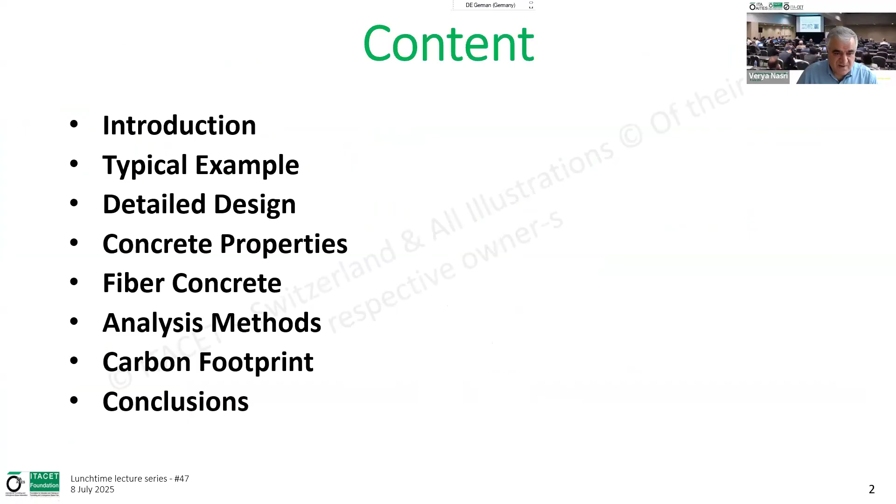Thanks a lot, Christine, for the introduction, longer than what I gave you. So, one second to share my slides. Hello everybody, and thanks for attending. I am going to talk about a real-world example, and through that, try to explain some major details, give you an idea, and later you can go and read more on that subject.

So I start with this example, which is a metro tunnel, the conventional one-track 6-meter diameter. Here, if we talk about ring configuration, for this size we are using 5+1 with a small key, or 6+0 with a big key, which can also be called 4+2. All the segments are practically the same size. We define the segment length based on the alignment and minimum curve radius. We try to optimize it even to the centimeter because that's a lot of material over kilometers. The concrete used for this particular project is 50 MPa; usually nowadays they use 60 MPa easily. That's typical. You see here the configuration for the tangent alignment, and also a small detail about the key segment.

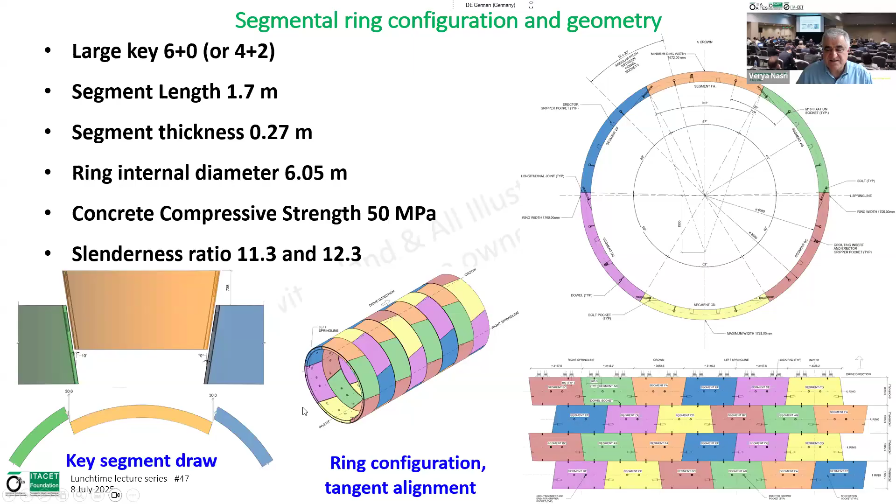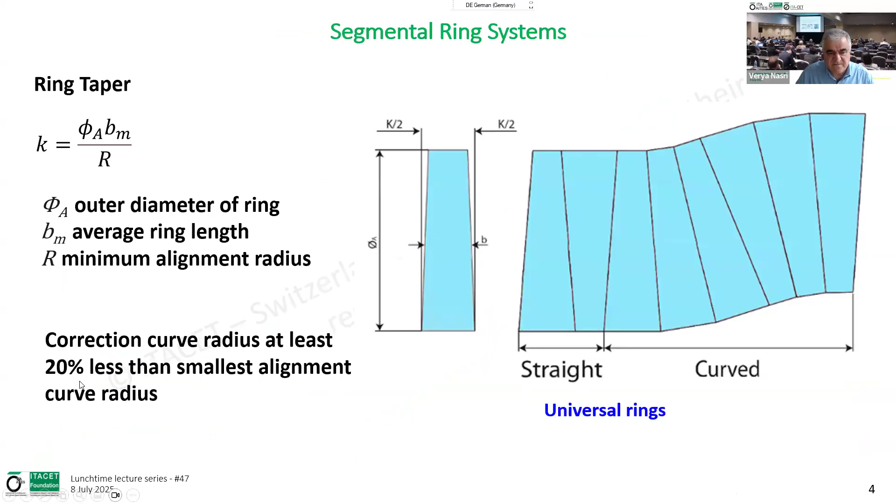Draw with installation of the last element, which we have to play with the angles to have a draw which fits into the machine's basic characteristics. Then for this project, we use a universal ring, which is the best configuration with taper on both sides. For the taper, we use this simple formula: phi A is outer diameter, bm is the length of the ring, and r is minimum alignment radius. We should reduce it by 20% for correction required for the alignment.

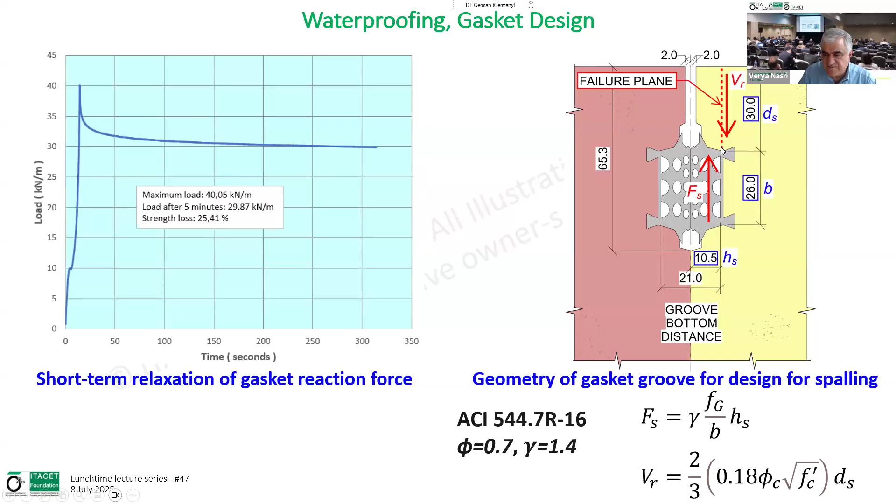Then we divide the pressure, the force we have here from the gasket, by the length B, that gives us the pressure. Then we apply it with the height HS, and that would be the total load, which should be resisted by this shear of this edge of the segment. Based on that, we design the geometry for the gasket.

Now we go to the issue related to the gasket, but for the design of the dowel in the circumferential joint. One loading which governs is accidental removal of the thrust jack for lack of power or any other reason. So you see here the free body diagram: the weight of the segment, the force of the gasket, and the resisting force of the dowel here.

So we take a moment around this pivot point, which is this edge of the stress relief area. This is the moment, and based on that we can find basically the forces in the dowel and see which dowel we can use for the design.

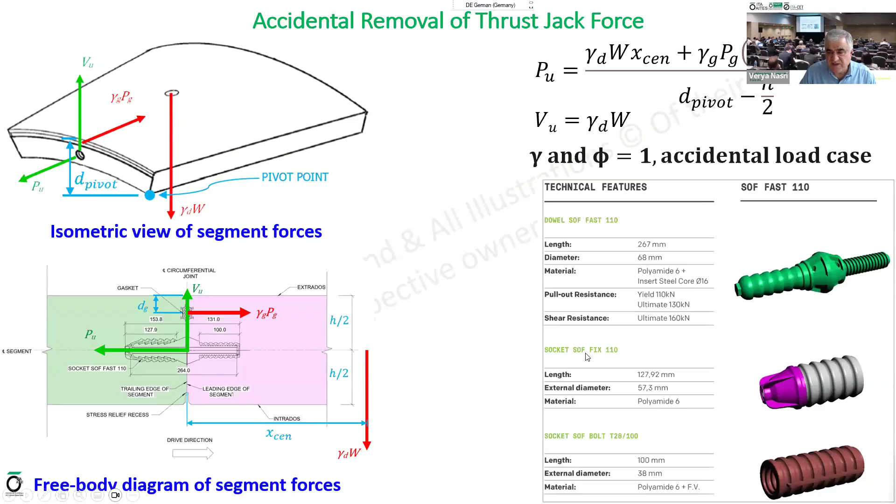Now we can go a little bit farther with a particular dowel. This is the dowel pull-out test results. At yield, it moves about 7.7 millimeters. If we consider the movement around the same pivot point, with this 7.7, the movement around the gasket will be 8.9. I showed you that we had 12 millimeters, which is when the gasket was completely open.

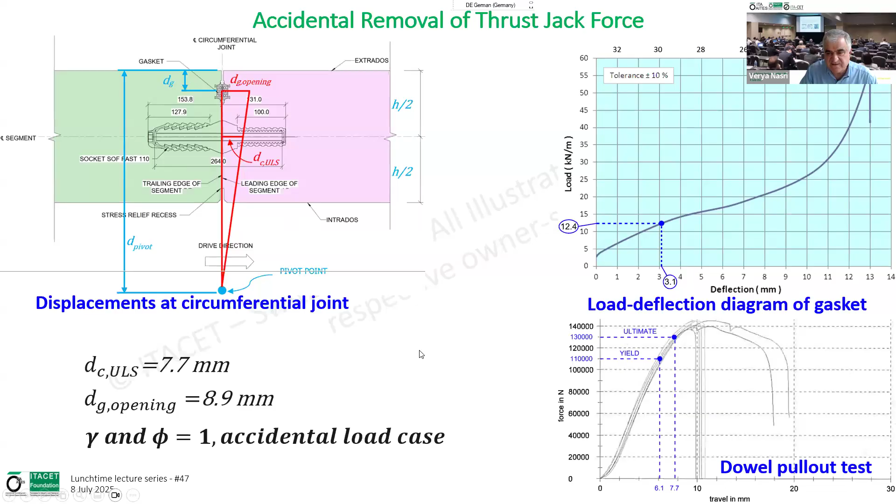So the difference between the two is 3.1 millimeters, which we take to the load deflection curve of the gasket. We find that we have 12.4 kilonewton in the gasket, which will be used for the design to verify whether we have a stable situation here.

So to design the bolts, this is very straightforward - the pressure in the gasket. We have to consider two angles: the angle of the longitudinal joint and also the angle of the point, and the formula we see on the side. This will give you the design of the bolt based on the characteristic of the bolt.

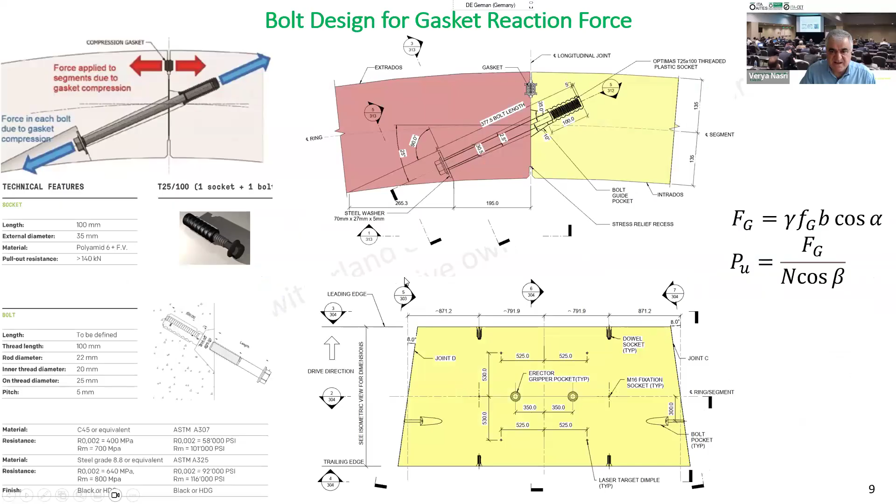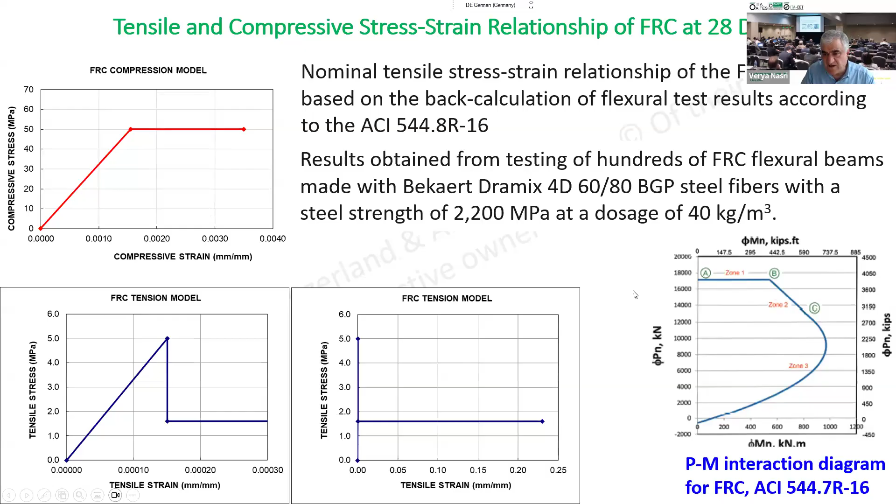This is explained in Appendix A of 544.7R ACI. So now, how we design our mix.

If we have a number defined for residual strength, say FR3 at 4.6, we have to consider a higher number as the mean result of the test to get this number with 95% confidence. What we do, we use this formula for the mean.

This is the specified value we have. This Kn is a coefficient depending on the number of tests. For example, here we are using 12, so the Kn is 1.71. And Vx is a coefficient of variation, which usually at the beginning we use 20%.

So based on these numbers, for a 4.6 FR3, our average mix result should be 7. So this is how we design the mix.

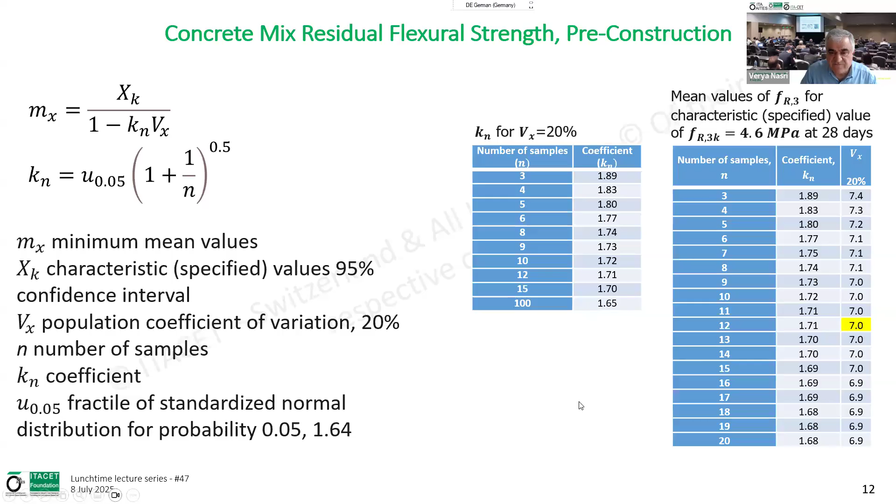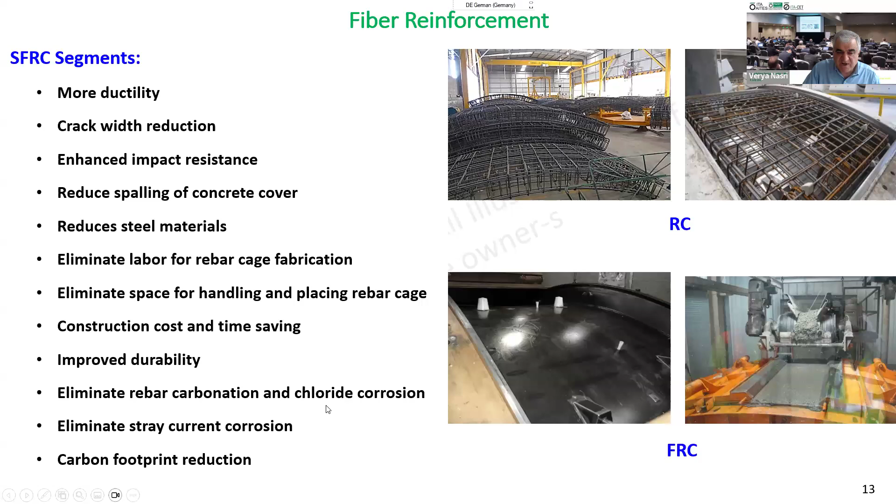Now we go to the advantages of fiber. You are all familiar with better ductility, less crack, better impact and spalling behavior, less steel and less labor to put these steels together, less space and workshop for the steel, and then less cost and schedule, better durability. Since we don't have rebar, we don't have carbonation, chloride, and stray current corrosion, and less carbon.

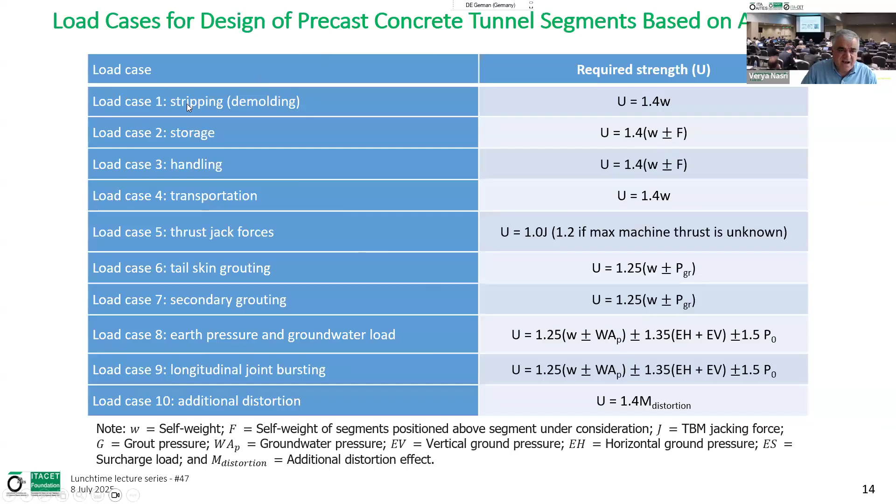So what we use now for load cases and load combination, we use this kind of information from ACI for different load cases. This is the basic load cases for production and transient.

You can define it yourself. For each of these equipment, you will have your free body diagram and the relevant moment for it. You see for this particular example how those are built.

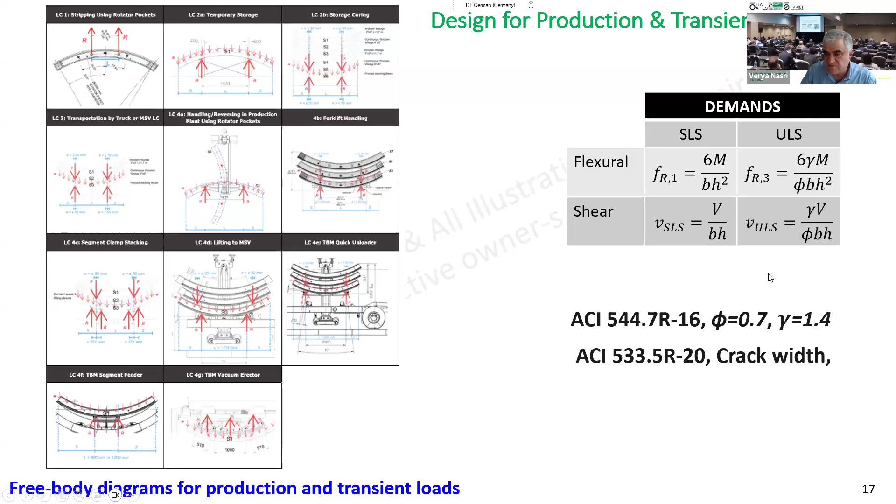Then in terms of the demand for SLS and ULS, based on FR1 and FR3, for ULS we are using load factor and strength reduction factor. These are typical. And some small discussion about thrust jack force.

For this particular example, David will talk about more detail on this subject. So we use this Iyengar diagram, which is analytical. This formula here is drawn.

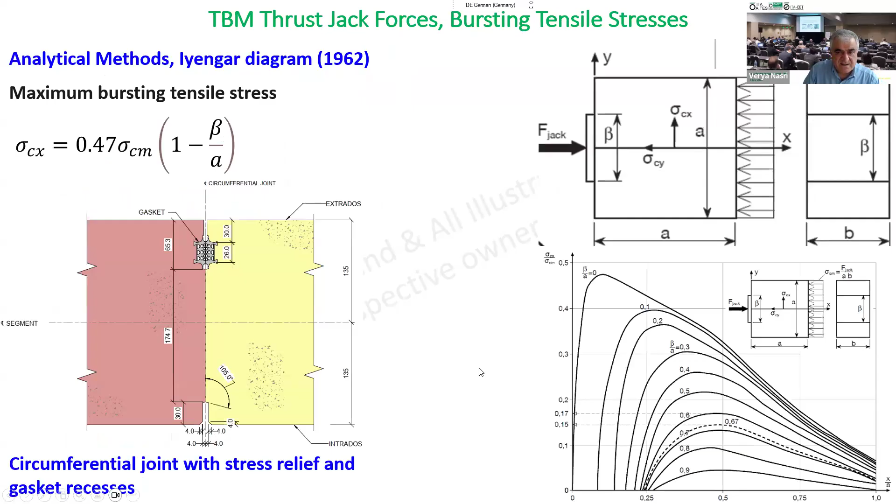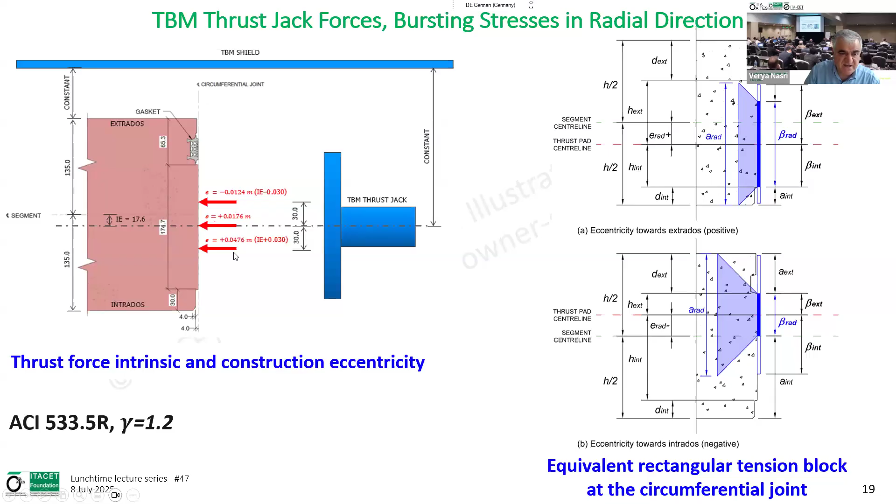Here you see the section in the radial direction. We have here intrinsic eccentricity because of the presence of the gasket, and we have to consider a construction eccentricity based on ACI, say 30 millimeters on both sides of this. Based on that, we do the calculation.

We can have dispersion in both directions, in the circumferential direction also. You see here the configuration of the pads. We have to design the size of this, but it should not be closer than 120 millimeters to the edge of the segment.

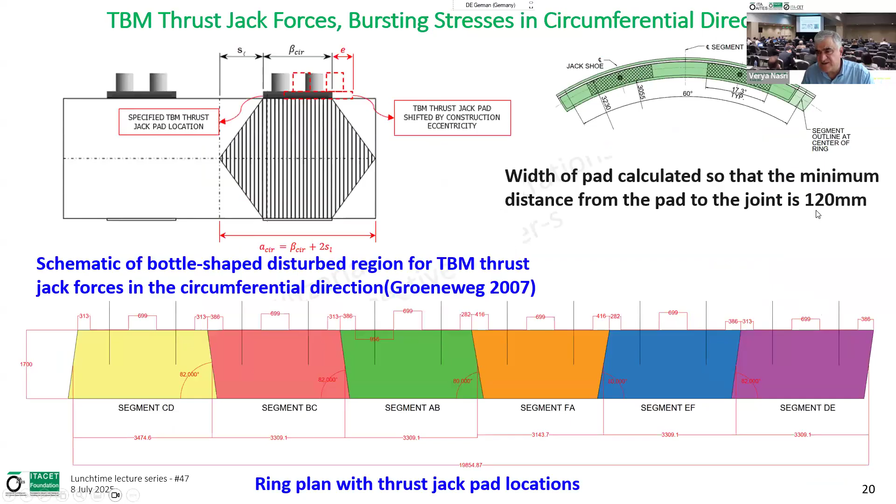Then we go to the spalling now. We don't have an analytical formula for spalling, so we have to do 3D analysis. We have to do a nonlinear analysis, and we have to verify the cracking.

In this particular case, we use a total strain crack constitutive model. There are different constitutive models for cracking based on a smeared model. We consider different segments and different eccentricities, and for boundary conditions, we consider normal compression-only boundaries.

Here you see the allowable cracking from 0.2 to 0.3, from the Austrian Tunneling Association, depending on the type of application and level of dryness.

For the spalling, as I said, in the longitudinal joint, you see here either we have this kind of trapezoidal or triangular distribution when the joint is open, when the resultant of the load is outside the middle third of the segment. You see here, for this particular case, we draw the crack width based on the thrust force.

This is the region which is not acceptable, beyond the values which are specified. You see the spalling stresses between the pads and the cracking, the result of the modeling.

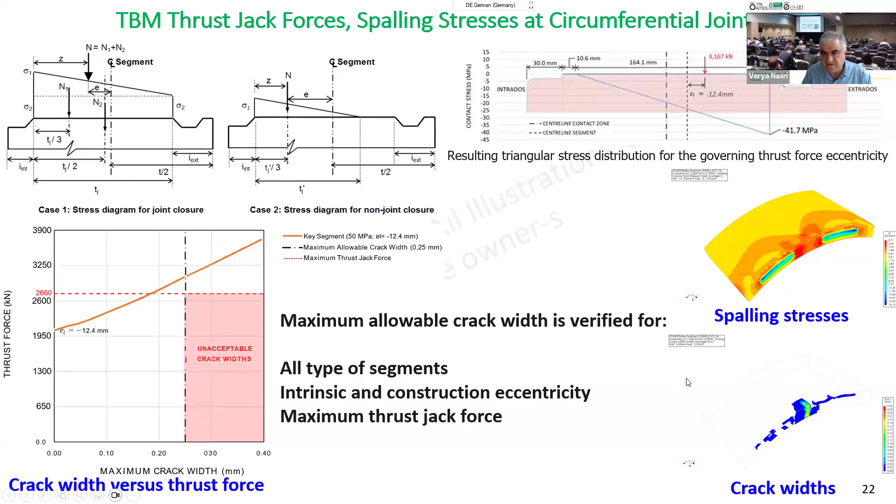Then we get to tail skin backfill grouting. Nowadays, 2-component grouting is used, which at the beginning is liquid, then mixes within a few seconds to gel, and then over about 25 minutes gets to 1 kPa, and after 1 hour about 100 kPa.

So then we use this formula to solve for the pressure of the grout minus pressure of the water, how much it should be more. And then we use the equilibrium in the vertical direction based on weight of the liner, buoyancy of the grout, and then shear stress of the grout.

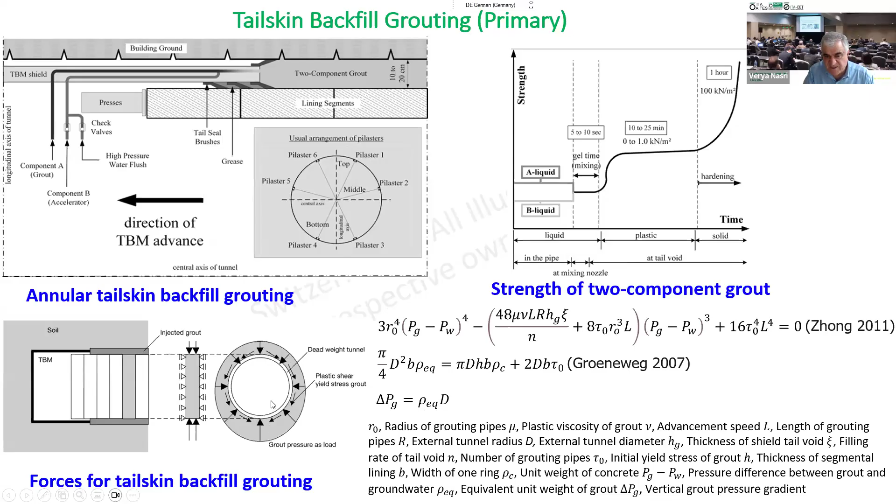And we find the unit weight of the grout, and based on that, we find the grout pressure gradient. From that, we use this model of the ring for that pressure and its variation applied.

So we use the interface between segment and also ground boundary, depending on if it's rock or soil, and how flexible it is. Different models can be used, and we get axial and bending, and check it with the interaction.

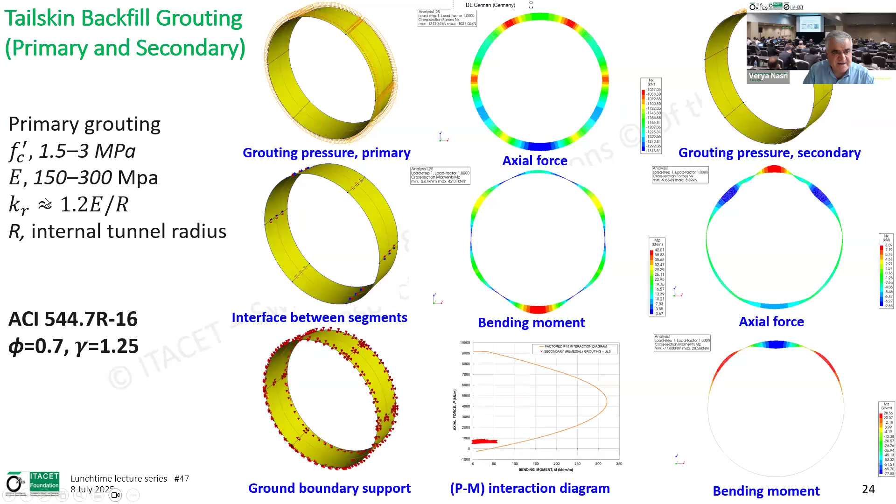Now if we have deficiency in primary grouting, we do secondary grouting. This is pressure applied on a limited area. But in this case, the primary grouting is already hardened, so we should consider its parameters in the analysis.

We use sequential excavation modeling, and we apply face pressure and its variability. We consider conical shape of the shield using gap elements, and then we use grout pressure considering the age and strength of it.

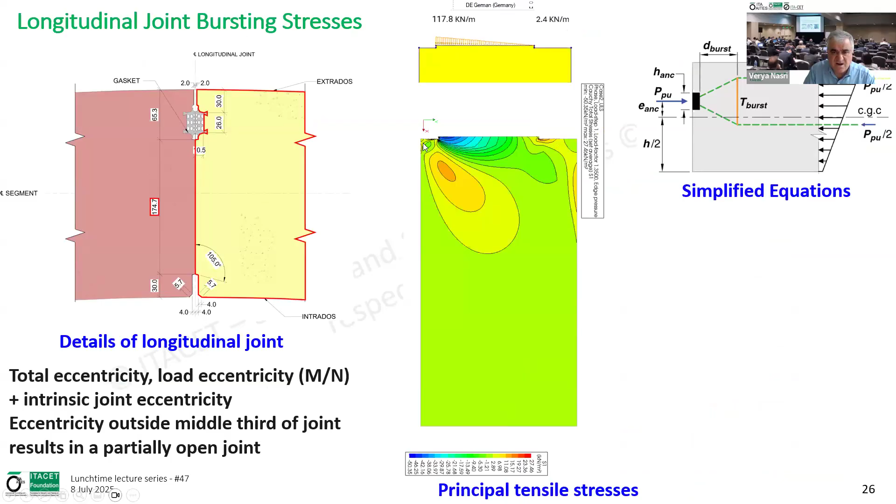So one load case is also longitudinal joint bursting. For this, either we use a simplified equation from ACI or we use a 2D finite element. This is very simple. We use a model here which is twice longer than the length of the segment.

And with that, I get to the carbon. With fiber, our carbon significantly reduces, because if we use fiber instead of rebar, we will have about half of steel weight, and the CO2 equivalent factor for fiber is less than half of the steel. So using fiber instead of steel, we are saving carbon by 5 times.

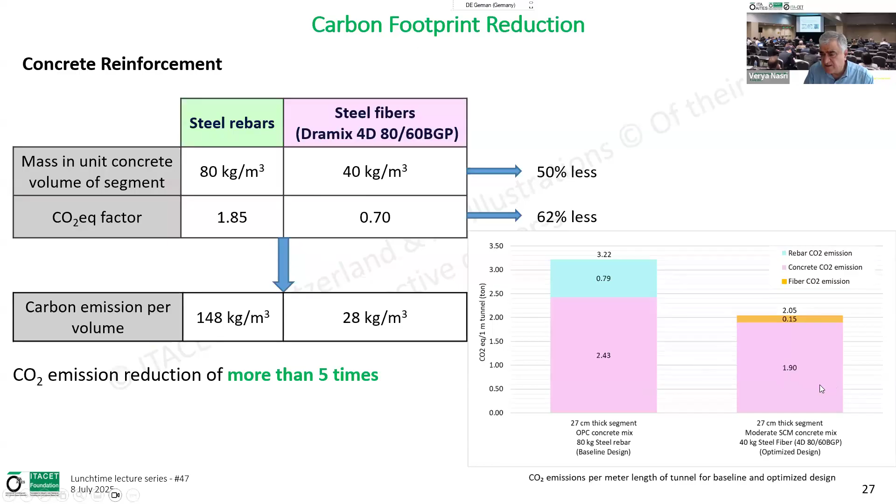Here you see the comparison. Here also we use some SCM, supplementary cementitious material like slag and also silica fume, to reduce the carbon from concrete also.

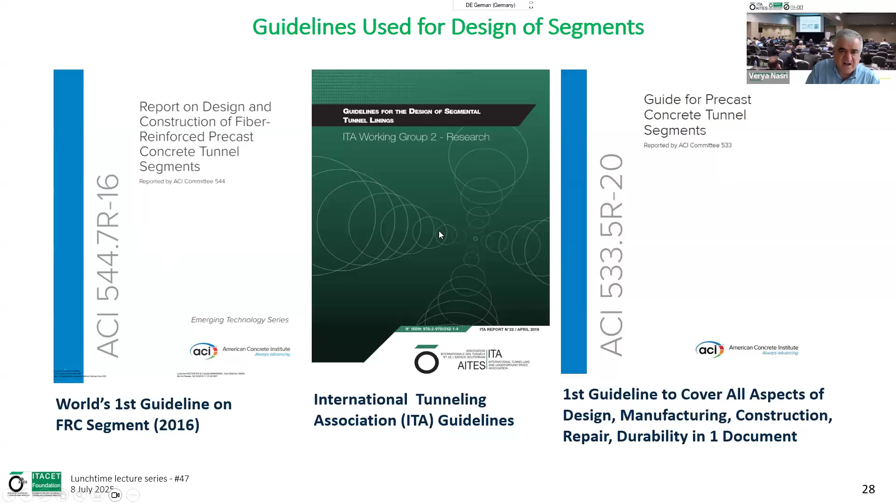For the references, you can use this document, two ACI documents, one for fiber, another one general, and the middle one ITA, which we contributed to producing, and also a handbook which covers everything I said in detail and many other subjects. This is a good reference.

So the conclusion is the fiber is really the way to go. The rebar is obsolete for the segment. It has significant advantages, I won't repeat it here.

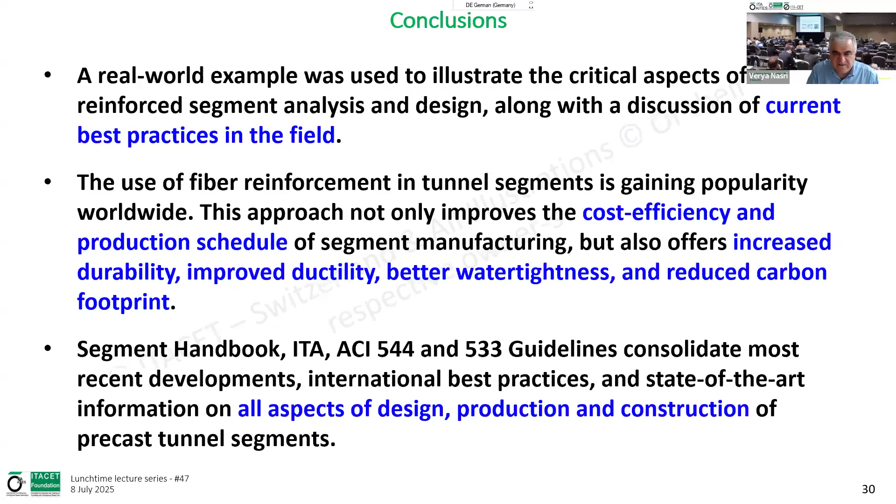Through an example, I explained some details of the design, which you need to follow up with books and other references, and also the document I mentioned. These are the guidelines, but this is basically advancing technology. Things are moving very fast, and this needs to be updated with time. This is some other references you can consider looking at.

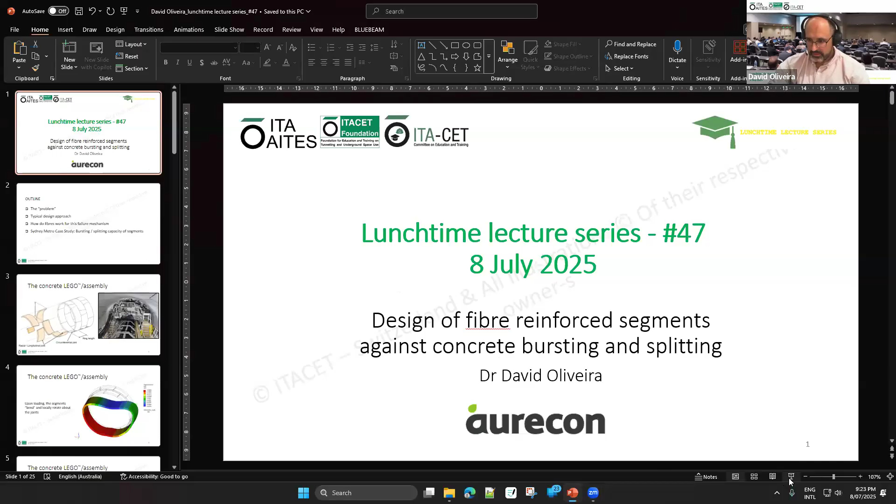All right, okay, well thanks everyone, and good morning or good afternoon, good evening, depending on the time zone you are. Thanks for attending and listening to me.

I chose this topic, and very briefly touched on a bit of this. I selected it because there is generally a lack of detailed guidelines when it comes to designing for bursting and splitting using fiber reinforcement. In a lot of the guides that Verya showed, you'll find recommendations on how to estimate the splitting forces and how to design conventional concrete reinforcement, but how to use fibers is generally something we find difficulty finding detailed guidance on. So I thought it was a good idea to share my own experience here. It's not the experience of ITA.

And here, maybe at the question and answer section, what others have to say. I'm very pleased to say, though, that although this is my own experience, the ITA Working Group 2 has also prepared a comprehensive guideline on this. I'm not part of that group, I haven't been involved, so I'm very much looking forward to it because we do need that. I know some of the people working on it are very knowledgeable, and certainly it will contribute a lot. So hopefully what I'm presenting here is consistent with what they're saying, because this is based on my own literature research and some of the experimental work I have done in the past.

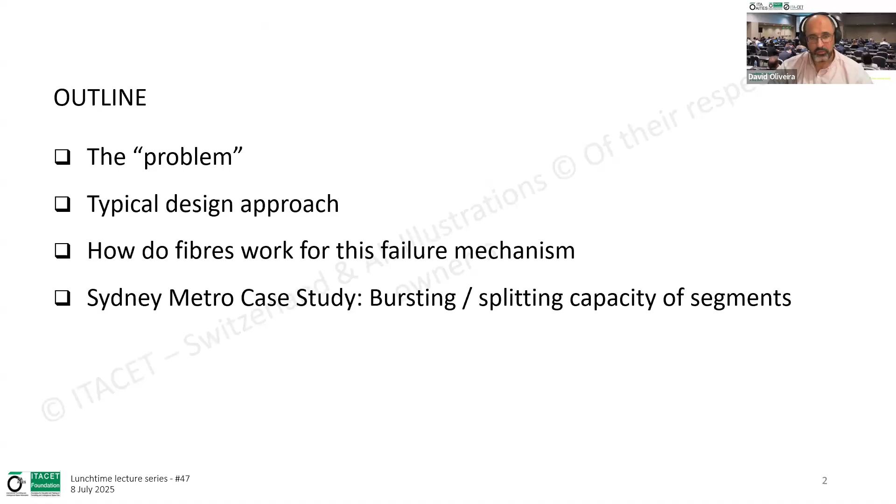So I'll very briefly introduce what the problem is, what we typically do as practitioners designing segmental linings, how we see fibers working in this particular failure mechanism, and present some previous studies and research done by a couple of groups, particularly from Italy. I'm going to present one case I was involved in, the Sydney Metro case, how we assess these and move forward using fiber reinforcement only, avoiding conventional reinforcement.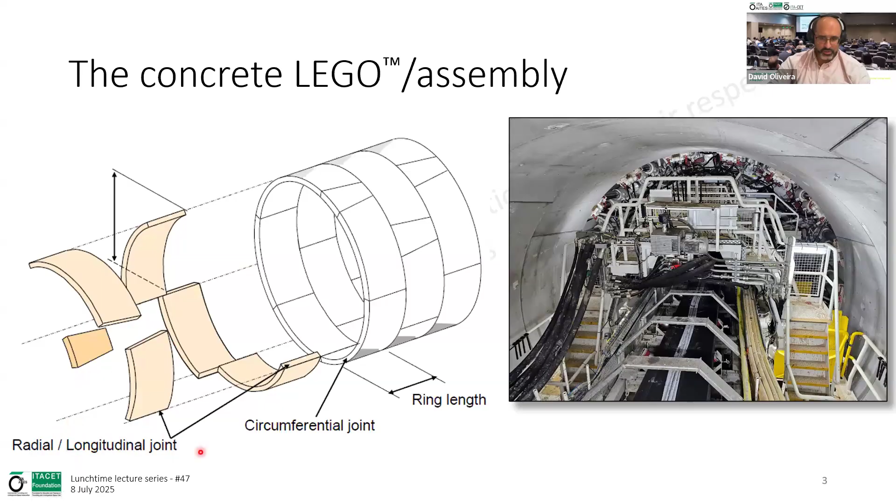We all know what a segmental lining is. I call it the concrete Lego. It's just a series of pieces of concrete put together in almost like a Lego assembly. The way these segments interact is via joints. Within two rings, they interact via the circumferential joints, and between each segment, they interact via the longitudinal joints, as you can see in the picture here. Here's the longitudinal joint, also called radial joint, which I prefer to call the longitudinal joint. So that's how they interact.

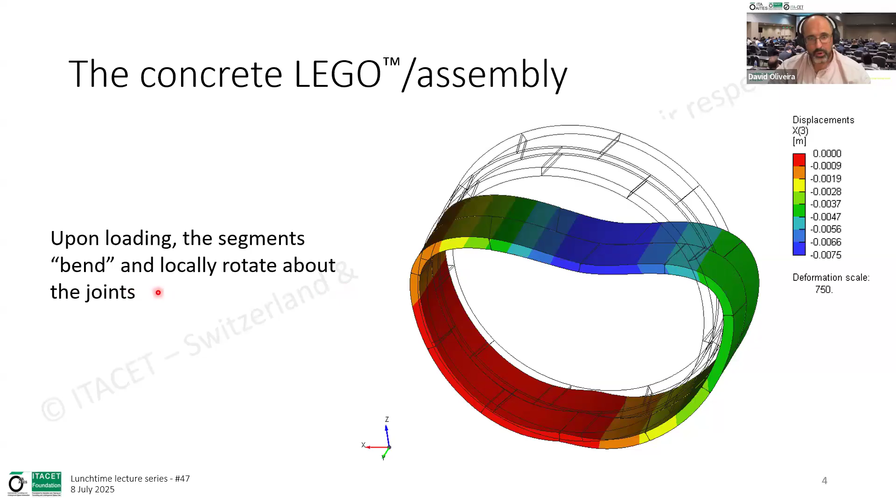So they locally rotate, and the way forces are transferred from one segment to the other is by simple concrete-to-concrete contact. These forces are transferred via compressive forces, which at this contact will typically have a certain distribution, depending on whether the joint is open or closed, as Veya mentioned. This force will generate compression right at the top of the joint, and eventually they will generate internal tensile stresses that can cause bursting in that region and can cause bearing failure at the top of the joint. So this is the typical thing we have to design against.

In general, we can summarize the design process, and I'll particularly focus here on longitudinal joints, although a few things are also applicable for circumferential joints. We can put this process into a two-part process. The first component is to assess how the joints will behave, how they will deform and rotate, and generate a particular contact stress distribution. The second step, once you know those contact stresses, is to assess how we can design the segments to resist those stresses and not fail in bearing and in tension. This second point is the focus of this presentation.

The first topic here is something that, as far as I understand, will be very comprehensively addressed by the future ITA working group guideline, which I believe is soon to be published. I'm also very keen to give it a full read because I haven't been involved. So what I'm going to focus on here, particularly because we are interested in the effect of fibers and how we can better use them, as Veya showed, is very important to reduce carbon footprint, reduce costs, and a series of other benefits, how we can use fibers to address this particular failure mechanism.

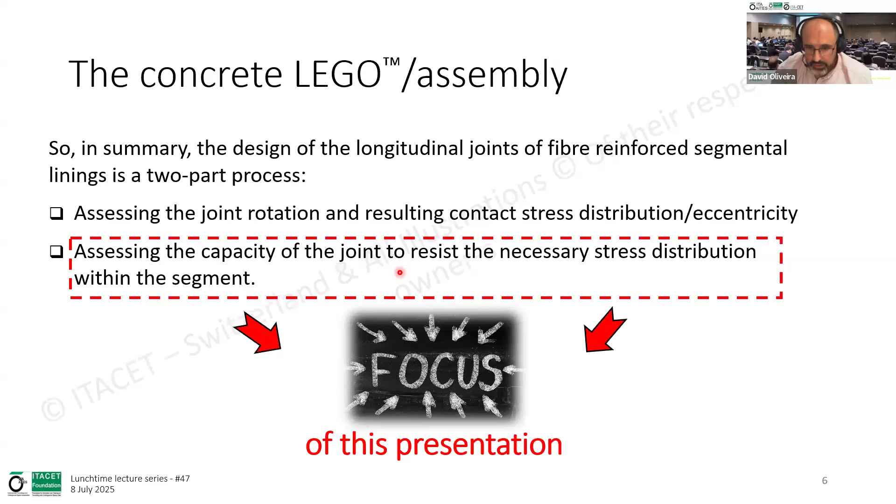So typically, in practical design, the thing we first do as designers, as they also touched on, is once we know the rotation and the applicable eccentricity, we can identify what sort of contact stress distribution applies. We typically find an equivalent rectangular distribution, and from that we can estimate the distribution of stresses inside the segment below the joint contact here.

We look at the peak tensile stress that develops here. It's not the average, we look at the peak tensile stress and a maximum credible load, because we are concerned this could cause a brittle failure. We look at this maximum value and compare it to the tensile capacity, the design capacity of the concrete, which is the characteristic tensile strength multiplied by, or divided by, a reduction factor, which is typically

estimated or tested under tensile splitting tests, or the so-called Brazilian tests. If this maximum or peak tensile stress is less than the design capacity, then we generally deem it okay, and we do not introduce additional reinforcement for the joints.

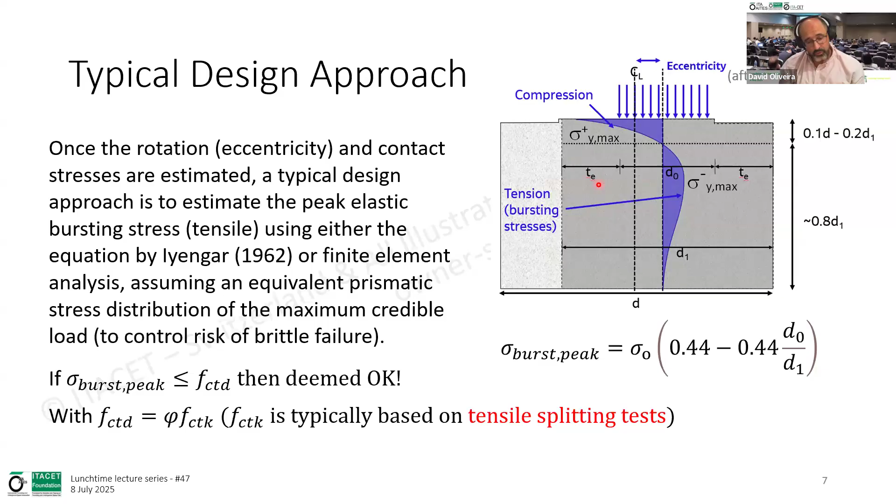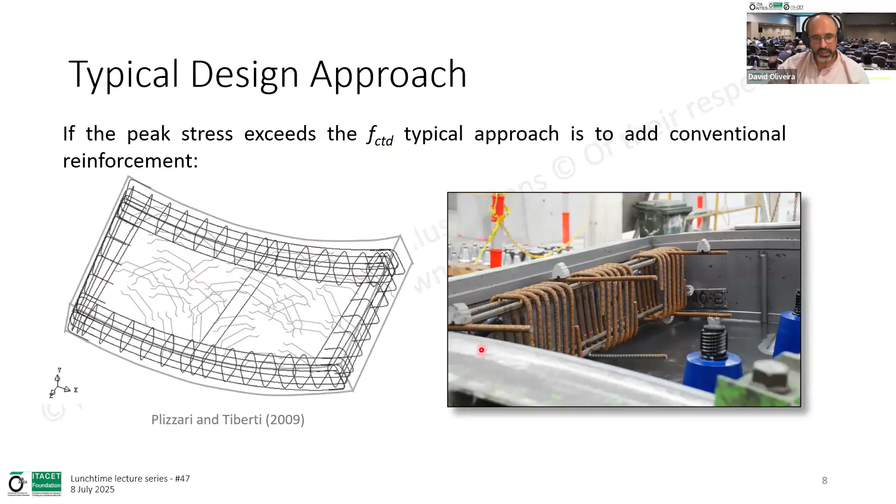This type of reinforcement is very well addressed by all the guides that Veria showed, the ACI guide, the ITA guide, the DAUB, and a few others, because this comes from conventional concrete design.

We use strut and tie models. We find the equilibrium of forces and identify the tie force we need to introduce with the reinforcement to resist this. However, this is not necessarily applicable for fiber reinforced concrete, because this is based on compatibility of forces or equilibrium of forces, and not necessarily compatibility of deformations, strains and stress.

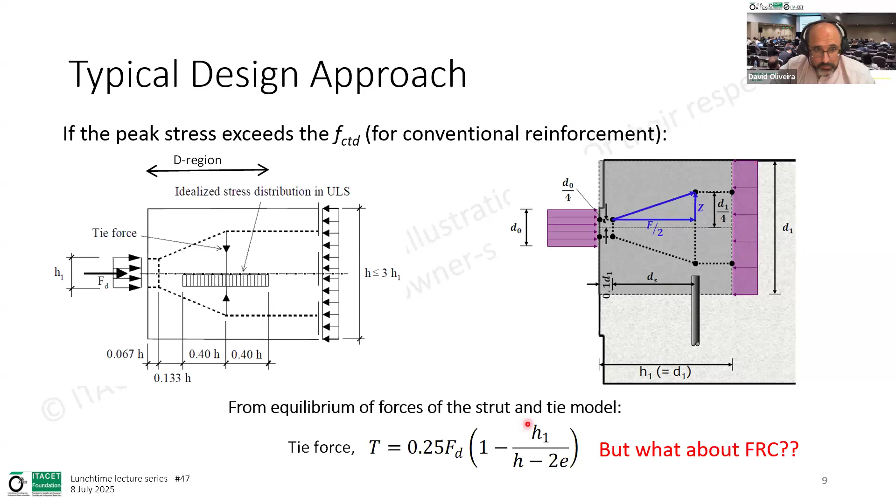So a few people looked at how we can approach this for fiber reinforced concrete. Here I present some of the work done by one group from Italy, Trabucchi, in 2022, who was discussing an earlier model from Schnütgen and Erdem from 2001. This is as early as I'm aware, though there might be others.

Schnütgen and Erdem still adopted some linear elastic concepts and limited the distribution of stresses under highly concentrated forces on the joints, restricted to a disturbed region or discontinuity region, as we call it, similar to those estimated by the linear elastic solution. The only difference is that they suggested using the residual flexural strength, corrected or converted to an equivalent axial tensile resistance.

Then Trabucchi, based on this model, presented an estimate of the maximal force that could be applied for this joint based on Schnütgen, calculated by this equation here, with this being the residual flexural strength corrected or converted to an equivalent axial tensile strength.

Continuing with these studies, actually even earlier than Trabucchi in 2022, there are other works by a few other Italians, Tiberti and Conforti. They all studied how we can better understand the failure under high concentrated loads and splitting, particularly splitting when using fibers.

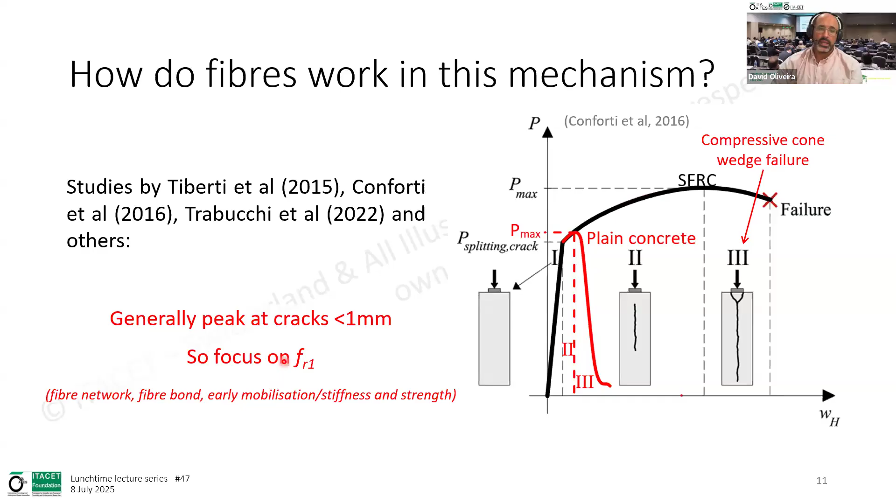We need to focus on a good fiber network, which means the amount or total length of fiber within a volume of concrete. We have to target that these fibers have good bond and very good stiffness to early mobilize their strength in small cracks, which generally leads to better performance using steel fibers, because macrosynthetics, for example, will require a lot more deformation to mobilize ultimate capacity, and they generally won't provide that sort of low, small crack width resistance.

With this in mind, we started looking at our design. I'll present here this particular study case from Sydney Metro. We did the typical thing here: a typical metro tunnel, internal diameter in terms of 6 meters. Our segment was 260 millimeters in thickness, and we estimated a credible maximum load in the order of 4 meganewtons, or 4,000 kilonewtons per meter, with a certain eccentricity, based on numerical modeling and some accommodation of tolerances for construction.

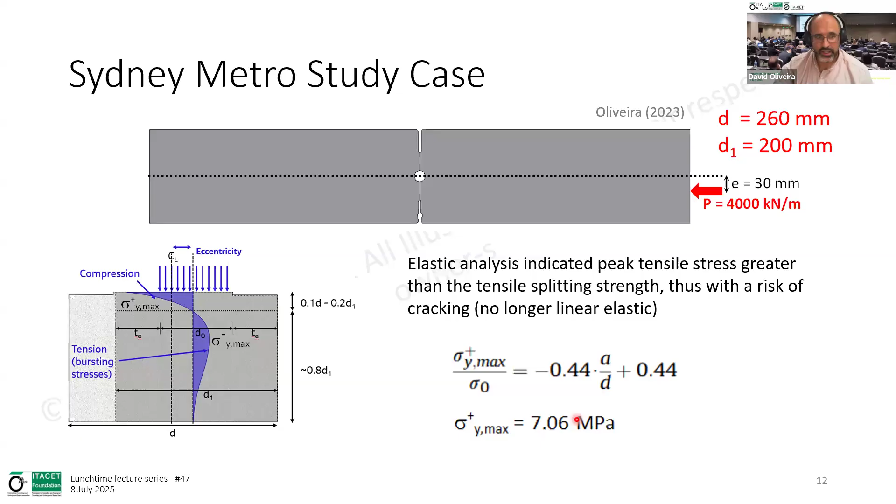Using that typical approach, we estimated peak bursting stress in the order of 7 MPa, which we identified was exceeding our tensile design capacity. Therefore, we would be going beyond the elastic limit into the cracking zone. And that's where the guidelines stop working, because that's the only recommendation we have up to this point: linear elastic, or introducing conventional reinforcement, which is something we didn't want to do.

So now we started investigating. At that time, this was circa 2021, maybe going into 2022. We looked at that model by Schnütgen from 2001, which is an earlier model. But one of the things we realized is it's still based on that elastic assumption, limited to the disturbed zone, similar to the linear elastic assumptions.

Using that equation with mean value of FR1 - I'm using mean value here because when it comes to non-elastic or non-linear behavior, most codes will allow you to use mean values if you do full numerical analysis, which we're going to do later. I'll show it to you, but for now I'm just using mean value for comparison purposes.

We estimated only about, using the fibers with that mix design, we'd only achieve about 2 meganewtons, and this is ignoring eccentricity. If we introduce eccentricity, we'd only estimate 1.7 meganewtons per meter, which is well below what we needed. And this is not even putting a factor of safety here or a reduction factor. We weren't quite satisfied with this, so we started looking at how we could improve it.

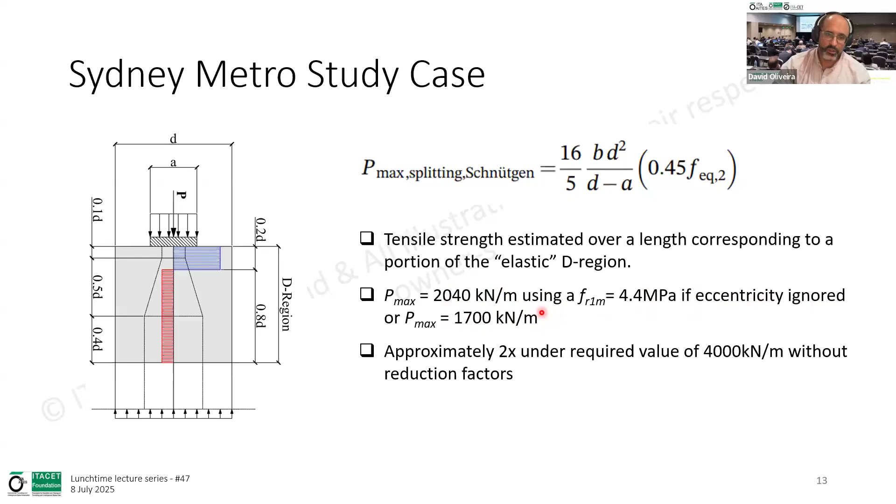The first thing we looked at is our segment design. We were originally adopting a 50 MPa, like Varia showed as well. But the contractor was already specifying for his segment a much higher concrete strength - not because we told them it would be needed, but because he wanted to demold very quickly. He was targeting to produce one segment every 4 minutes, and therefore he was using a much higher concrete strength, with a characteristic value of 65 MPa and mean value in the order of 75.

When we got that information, we thought we might as well use it. If we have that strength, we might as well take advantage of it and not just throw it in the bin. And that also allows a slightly higher tensile splitting strength, which we could start to use.

One thing we proposed was to change the steel fiber that was being used to a higher performance one, which we decided was the Dramix type fiber, the 8060, because it has high tensile strength, a low diameter, and would provide a good fiber network - a good amount of kilometers of fibers per cubic meter. With that, we targeted and achieved a strain hardening flexural behavior, which would give us a very small direct tensile softening from first cracking to the CMOD 1, the 0.5 millimeter crack mouth opening, which is more or less equivalent to a crack opening displacement. So one thing is the crack mouth opening in flexure, and the other is the crack opening displacement in direct tensile.

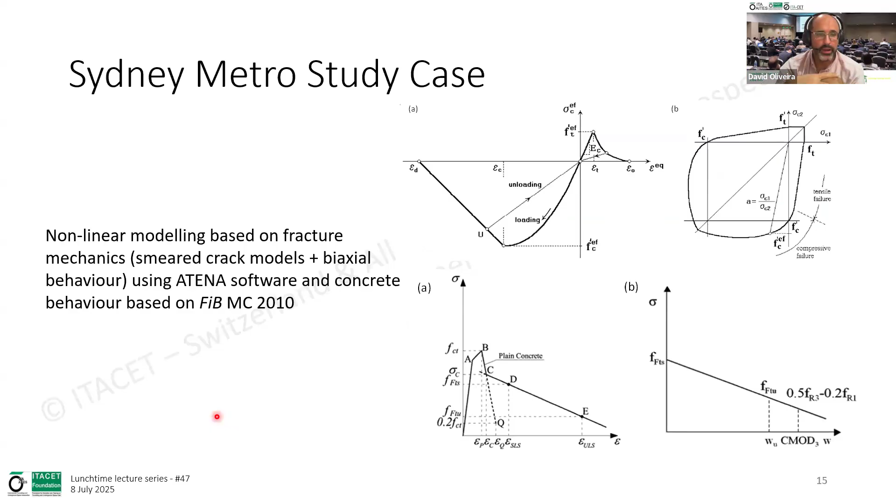So we are happy that we are achieving a very good performance mix, and we decided to also go beyond the linear elastic assumptions and do a full non-linear analysis using more sophisticated concrete modeling based on fracture mechanics. We used smeared crack models with additions that could allow for biaxial enhancement, using ATENA concrete software as our tool, basing our concrete modeling on all the recommendations in the FIB Model Code 2010.

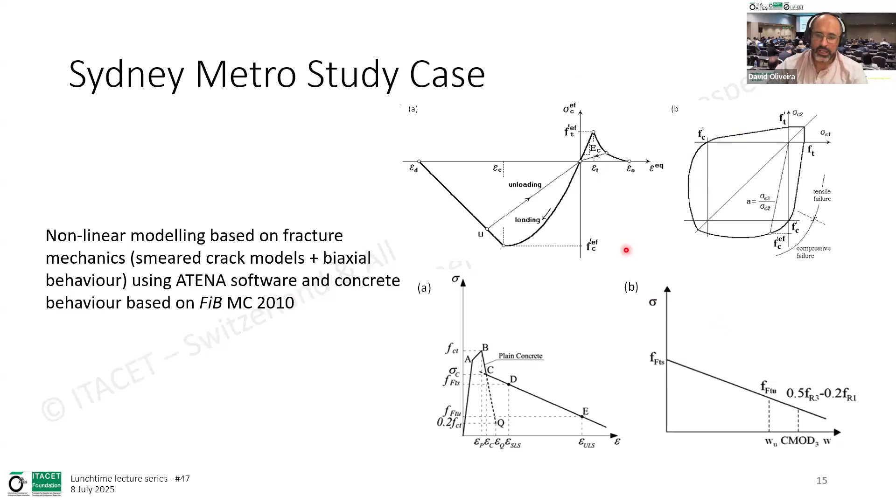Here are some of the constitutive equations and graphs found in more detail in the FIB model code. The first step was to be confident that our modeling technique could represent real cases, so we simulated some tests done by Conforti in 2016. Using their concrete properties, we could fully represent what was happening in the test results, both in terms of load and crack opening, but also crack development and failure mechanism. You can see here the cone failure and the development of the splitting crack. This gave us confidence that we're on the right track.

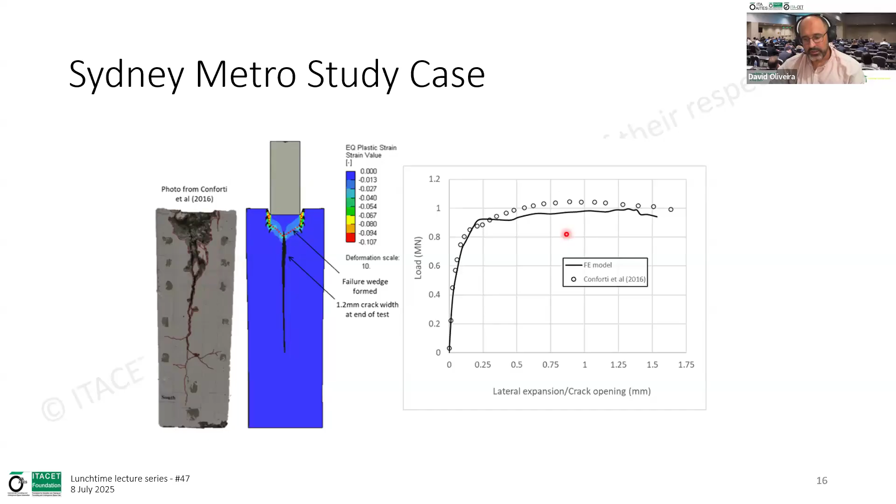We started simulating our joint rotation numerically as well, and what we observed is that by doing nonlinear stress modeling with proper fracture mechanics, we were predicting much higher capacity than those from the empirical application by Schnütgen, and also higher than what we were originally limited to in terms of linear strength analysis. We were achieving unfactored values in the order of 6,000 kilonewtons per meter, 6 meganewtons.

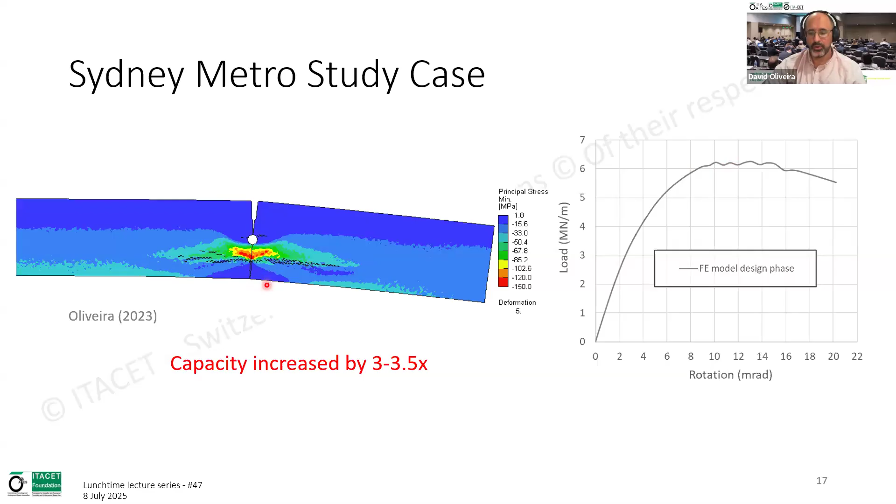So when you start getting results that seem too good to be true, we investigated further. At the same time we were lucky to find the work by Trabucchi happening almost parallel to what we were doing, demonstrating that the model by Schnütgen and Erdem was generally under-predicting severely compared to their experimental work - under-predicting by 2 to 5 times.

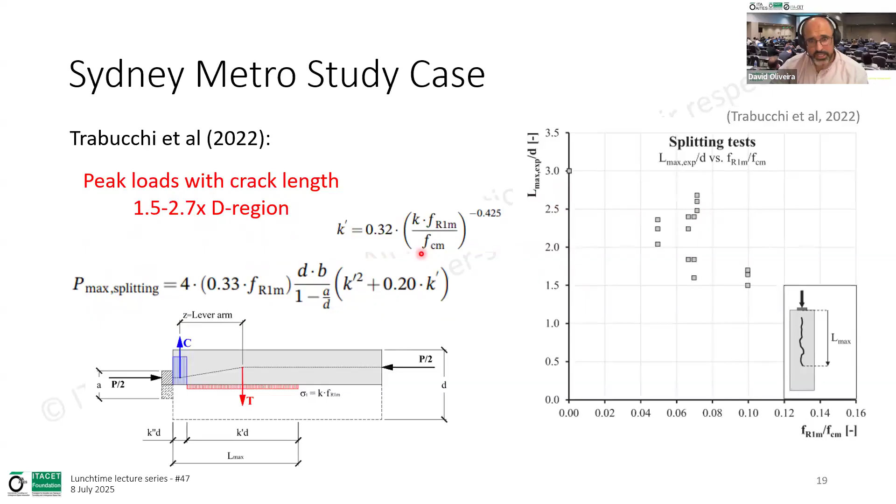What they did is propose a different equation that would take into account non-linear behavior, and that the crack needs to develop perhaps a bit longer than just the conventional disturbed region - generally 1.5 to 2.7 times - as long as the crack width is maintained small, always less than 1mm but generally in the order of 0.5 to 0.6 millimeters, they could achieve a higher result. They proposed this other semi-empirical equation that we decided to investigate too.

But not only did we investigate this, we investigated it with our own experimental work, making use of what the FIB Model Code mentions as verification assisted by testing. So we produced samples of our segment joint here - not the full 1 meter, it was limited to the same thickness and length as the thickness - but we introduced very high concentrated loads here.

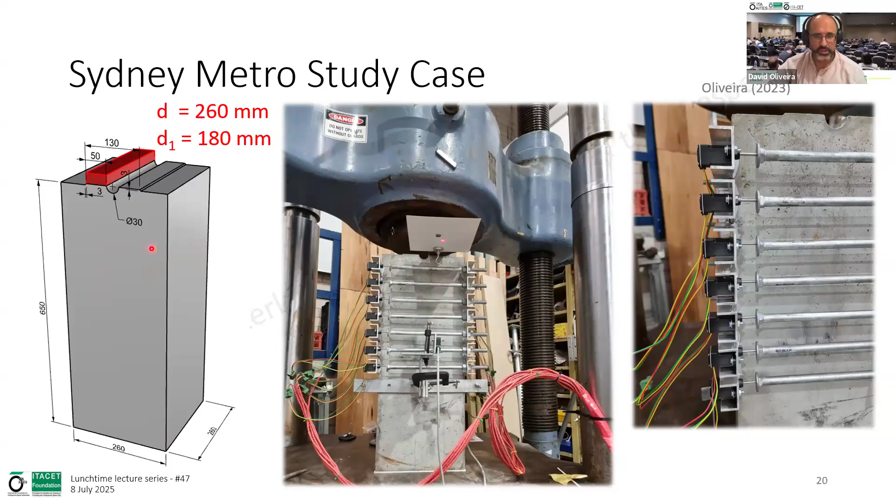The loads were applied only in this red zone, only 50 mil. So the joint is very small, only 130. We applied the loads with very high eccentricity to understand how this joint sample would perform under these highly concentrated loads. What we observed is that for the 260 millimeters length, they achieved something in the order of 1.6 meganewtons.

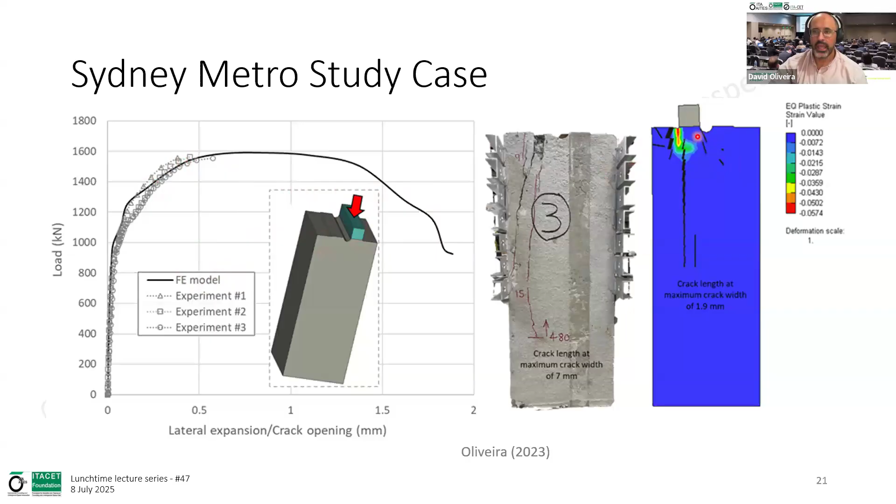This is not per meter - you'll see later that once we multiply this by 1 meter, we get very close to what we were needing. Unfortunately our compression machine wasn't displacement controlled, so it only picked up to the peak load, missing out on the post-peak behavior, which we captured with our own numerical model to try to recalibrate the original design predictions. We were quite satisfied that our model represented very well what we observed in these tests.

Now comparing what the model by Trabucchi would predict for these tests, we were pleasantly surprised that the semi-empirical model by Trabucchi would predict in the order of 1620 kilonewtons, while the test, if you remember, was about 1600 kilonewtons. But there was an interesting aspect here.

We would only achieve this prediction if we are using the full thickness and not necessarily the effective thickness that's governed by the eccentricity, which might indicate that for fiber reinforced concrete, the distribution of stresses may spread beyond that limited effective thickness and engage a bit more. So using that, it would predict similar values.

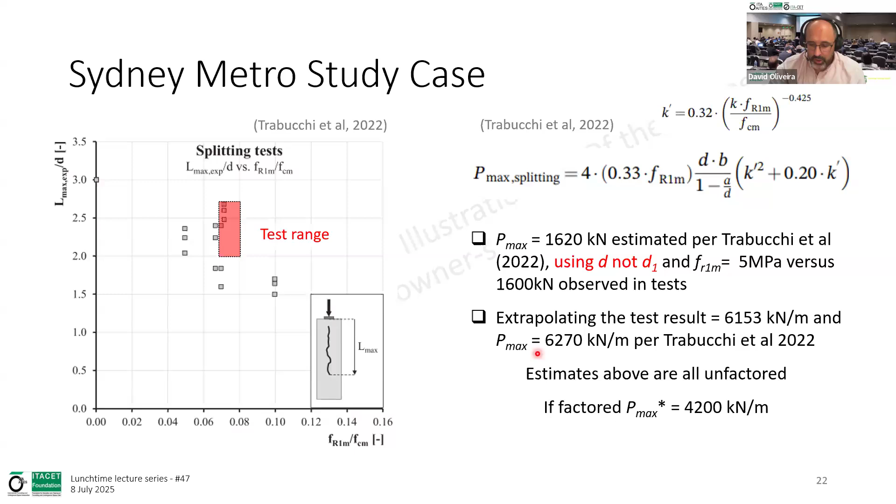If we extrapolate those test results, we would achieve 6 meganewtons. If we extrapolate the Trabucchi model, it would also estimate achieving 6 meganewtons. Because we recalibrated our own model, we reran it with the recalibrated parameters and put the two here to compare. Our original prediction was already pretty good, so the differences were very minor, just a small increase after recalibration. Again, the recalibration indicated we could achieve the capacity we needed.

When we added all of this together, it gave us confidence, particularly considering we were using quite a high load which, although credible, was unlikely to happen, that we didn't need to introduce conventional reinforcement and could use fiber reinforcement only in the segment. So the segment designed for Sydney Metro, that particular section, is entirely fiber reinforced only.

My final remarks are that the design of longitudinal joints against bursting and splitting still lacks good design guidance, and I think the ITA guideline soon to be published will shed some light. I'm sure it'll be fantastic work and will address a lot more than what I've talked about here, particularly the first bullet point I mentioned before.

The use of linear elastic assumptions generally won't give us the full benefit of fiber reinforced concrete behavior and may limit its benefit as a solution. We have to go to nonlinear modeling, which is essentially the third bullet point I'm discussing here, with promising results from the semi-empirical model by Trabucchi from 2022. In this case I presented, we demonstrated the capacity would be 3 to 3.5 times greater than what the linear elastic solution would predict, and we're quite satisfied with this, as the results were consistent with other studies.

Good afternoon, everybody. I'm going to talk about a project I was very much involved with for probably about an 8-year period, which was the Lee Tunnel project in London, which commenced construction in 2010 and completed in 2016. The Lee Tunnel is this section here. It was the first part of the Thames Tideway project. The Thames Tideway project was a very long tunnel, just completed last year, under the River Thames, to collect combined sewer outfalls along the river and deliver them to Abbey Mills pumping station, and then from Abbey Mills pumping station to the Beckton sewage treatment plant. This was the Lee Tunnel, and it was 6.9 kilometers long.

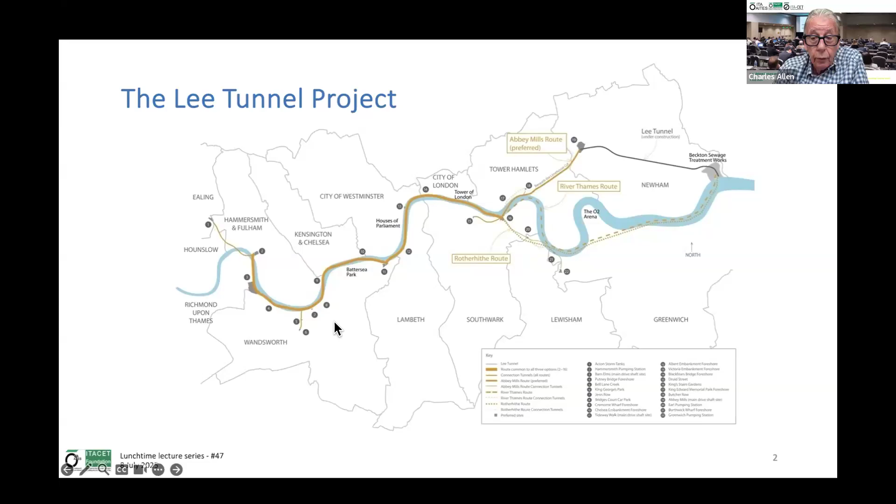Won't move. Are you having trouble moving your slides forward, Charles? Yeah, yeah. Could you try maybe the cursors, the arrows on your keyboard? I'm trying, that's what I'm trying to do. What about your mouse? I don't have a mouse. Okay, oh, that's it, there's a slight delay, but okay, there's no problem.

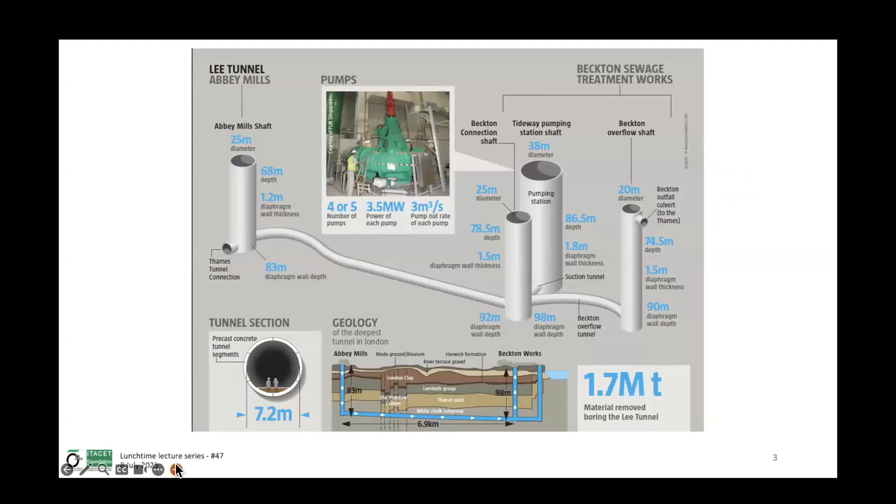Right, the Lee Tunnel - there's Beckton sewage treatment works down here, where we had 3 of the deepest shafts ever constructed in London.

The largest was the 38-meter diameter shaft, 86 meters deep. And then at Abbey Mills, we had another shaft. In fact, we built 2 shafts at Abbey Mills because we had to have a reception shaft for the TBMs from the Tideway project.

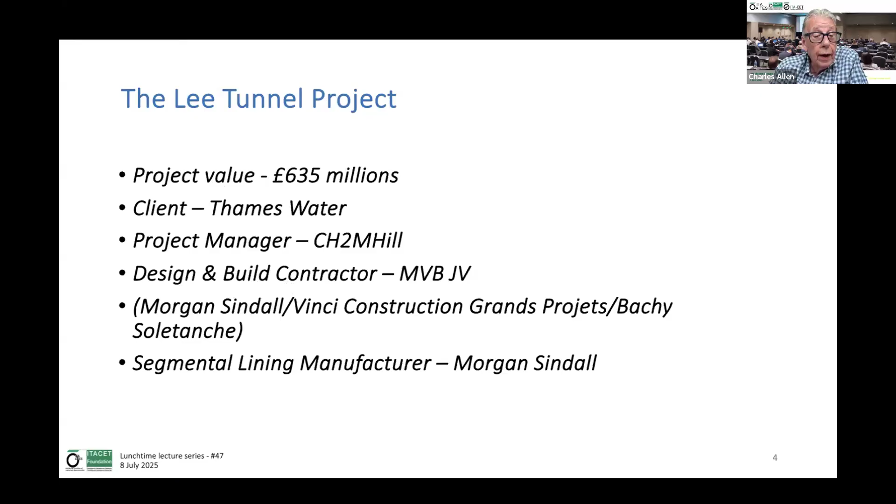Basically, tunnel 98 meters deep at one end, and I think 83 meters at the other end. The total length of tunnel was about 6.9 kilometers. The project value, when the contract was signed, was 635 million. It was built for Thames Water. Project manager was CH2M Hill, and I was a consultant to CH2M Hill on this project. Design and build contractor was a joint venture between Morgan Sindall, Vinci, and Bachy Soletanche, and the segmental lining manufacturer was Morgan Sindall.

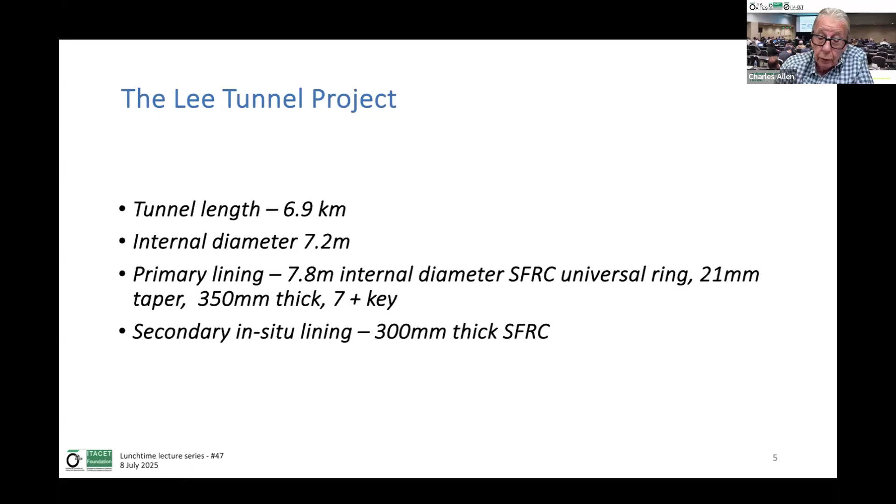Tunnel length 6.9 kilometers, internal diameter 7.2. That included a secondary lining 300 millimeters thick. So the primary lining was 7.8 meter internal diameter steel fibre reinforced universal ring with 21 millimeters taper, 350 millimeters thick, and it was comprised of 7 units plus a key.

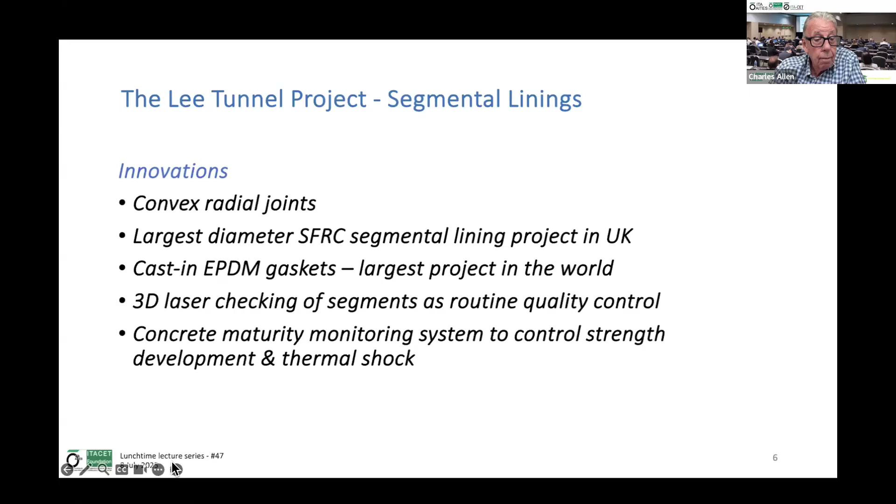The convex radial joints eliminate the crushing of segments when bird mouthing occurs, and David spoke about this earlier in his lecture. It maintains a continuous line of contact and eliminates eccentric loading due to poor ring building, so you always have an axial load.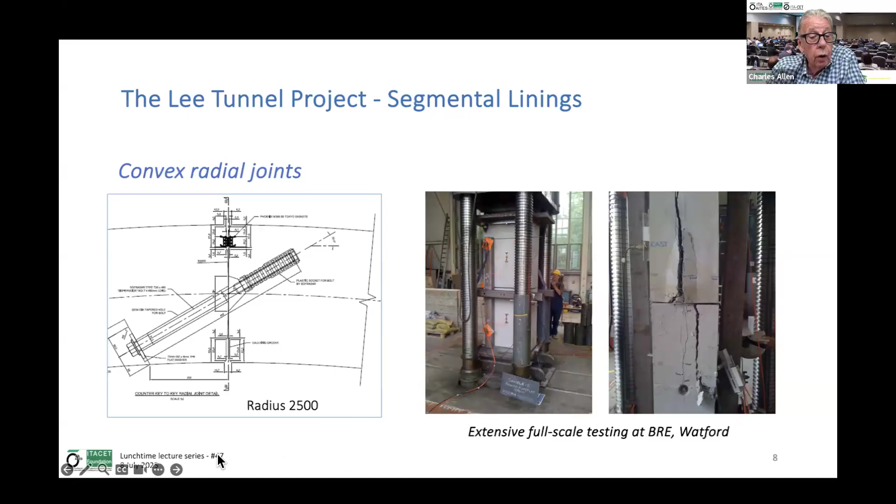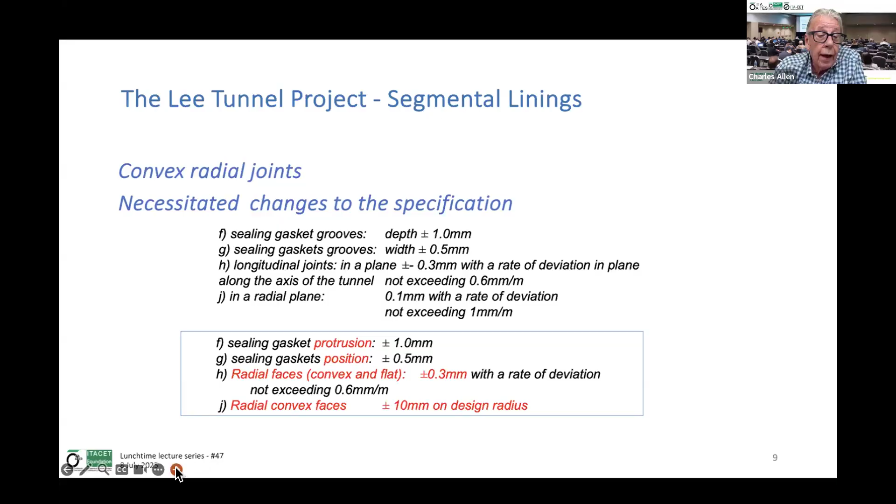For the radial joints, we cast some full-size units of concrete with curved radial joints with a radius of 2.5 meters on the joint, and we did extensive full-scale testing at the Building Research Establishment at Watford in London. We decided to adopt the curved joints, which actually meant changing the specification because the original specification had gasket grooves, and we were using cast-in gaskets on the radial plane. So we changed the gasket from grooves to protrusions, and the radial convex faces were plus or minus 10 millimeters on design radius. How we came up with this: the sensible thing we did was speak to the mould manufacturer and ask him what sort of tolerances he could achieve, and then we adopted that in our specification.

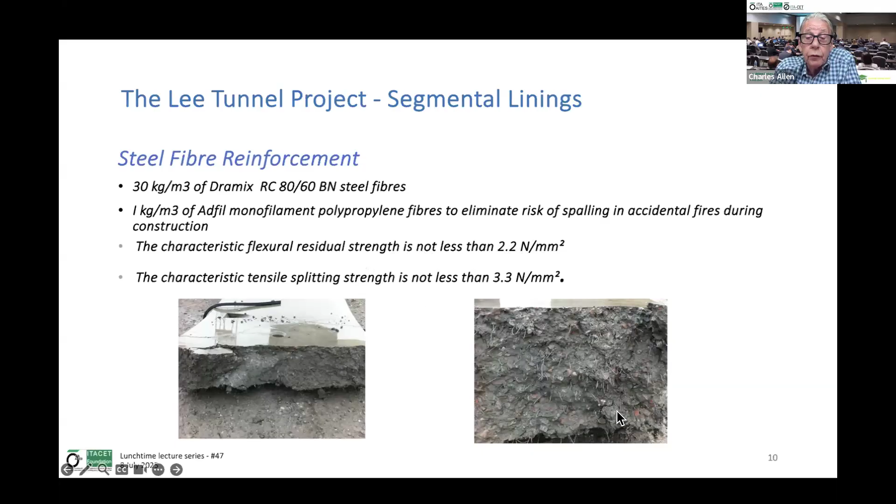The steel fibre reinforcement: we used 30 kilos of Dramix 80/60 BN steel fibres, and 1 kilo of Adfil monofilament polypropylene fibres. This was to eliminate the risk of spalling in accidental fires during construction. Obviously, we were not subject to road or rail fire curves. The characteristic flexural strength was not less than 2.2, and the characteristic tensile split strength was not less than 3.3. One of the first things we did during initial production was break a couple of segments in half and look at the fibre distribution, which was very good, so we didn't have to do that anymore.

We used cast-in gaskets, and we were only the second major project in the world to use cast-in gaskets. We used the Phoenix Tokyo M385 gasket. Recesses were machined into mould walls to seat the gasket, and the gasket was cast into the segment. At the time we were the largest project in the world to use cast-in gaskets. The benefits of the cast-in gasket in production are you eliminate the gluing station and associated labour, there's no requirement for a gasket clamp, you get better seating of the gaskets, and there's no health and safety problems with solvented glue in a factory or site location.

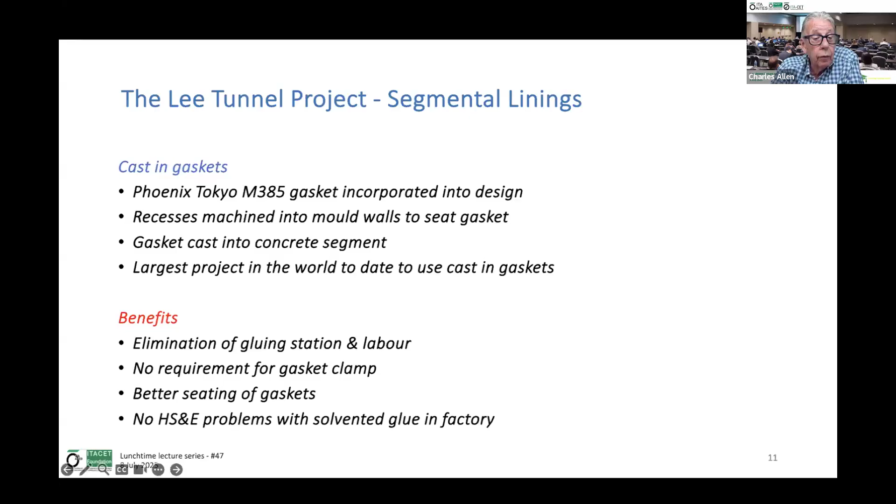We specified, and I actually drafted the specification for the segments for this project, the 3D laser checking of segments using a 3D cloud system.

The benefit of this is the finished article is checked, not the mould. There are fewer interruptions in production because you don't have to withdraw the mould from the carousel for routine checking. Checking a segment takes approximately 15 minutes, and we checked 5% of production routinely, giving much greater accuracy of measurement than calipers and gauges, which is important when using a universal ring that doesn't have a baseline edge to measure from.

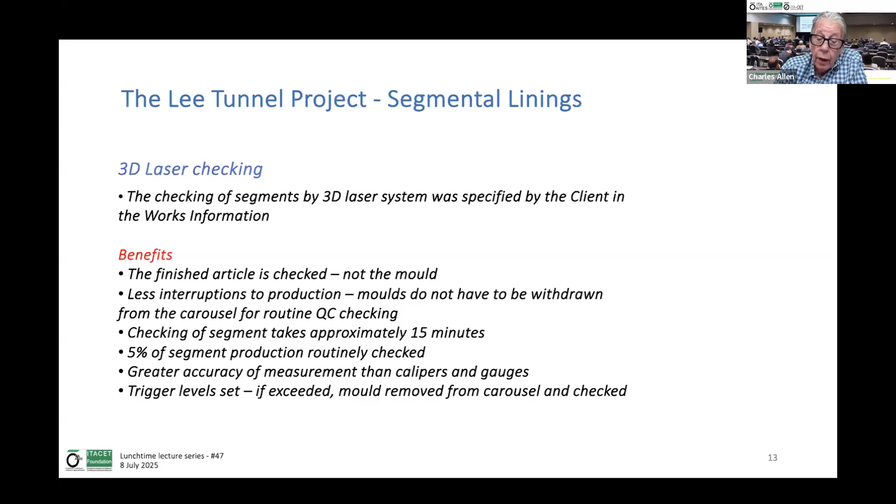We set trigger levels that, if exceeded, meant the mould would be removed from the carousel, checked and re-engineered if necessary.

So this was the setup for 3D laser checking. You have two laser stations recording, and the man goes round with the machine with a little mirror ball, moving it over the edges of the segment to check dimensions. It's all fed into the computer.

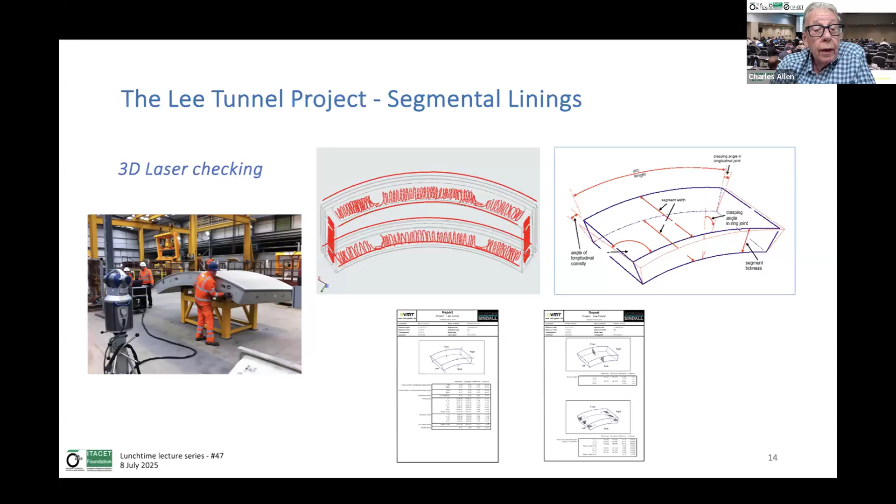The system we used was supplied by VMT from Germany. The segment producer was a bit reluctant to use this at first, but once he got used to it, he was very much in love with it, and he used it for all his subsequent projects after that.

We also incorporated maturity monitoring for checking early age segment concrete strength, and we specified that in the works information.

The benefit is that the actual concrete strength in the segment is known at demolding stage. You're not trying to crack a cube and compare it to your in situ strength, because the cube strength will always be lower than the strength of the concrete in the mould.

You get less damage to segments at demolding, handling and stacking, and curing chamber temperatures can be reduced, which gives you energy savings in the production of the segments.

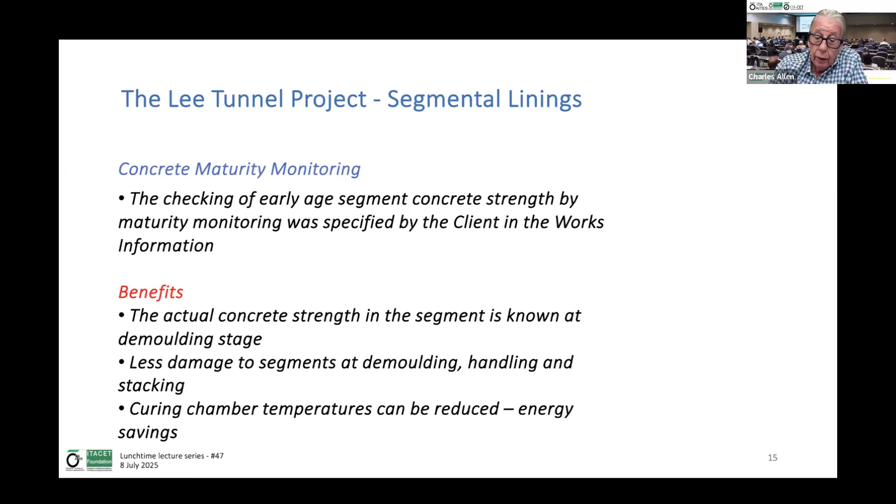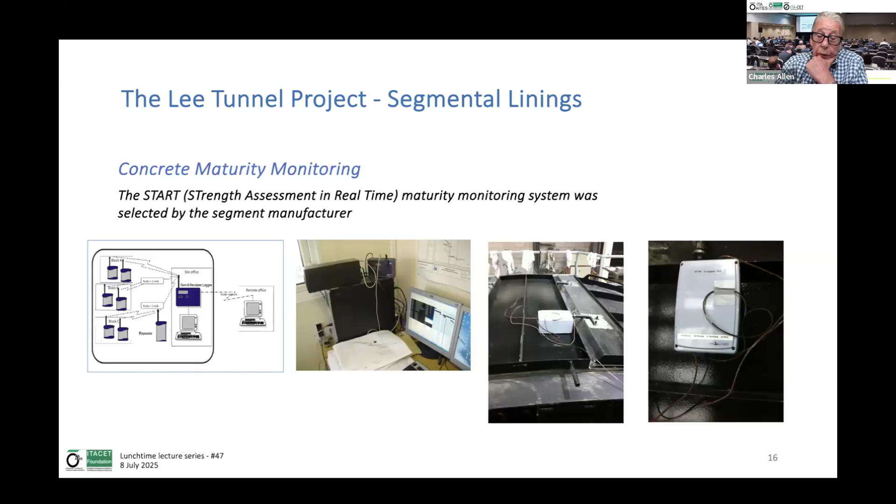They used a concrete maturity system called the START system - strength assessment in real time. This works by having thermocouples inserted in the concrete, connected to a little radio transmitter housed in a plastic case. This transmits the signal, temperature and time at 10-minute intervals, into a data logger in the segment factory office, from which you can download.

Also in the specification, and you often see this in specifications around the world - generally it's a copy and paste from the previous job - the storage of segments for 24 hours within the factory to mitigate against possible thermal shock was specified. So when the compressive strength required for demolding is attained, allow the segments to cool. Segments shall be pre-stored internally within the casting factory for a minimum of 24 hours after demolding.

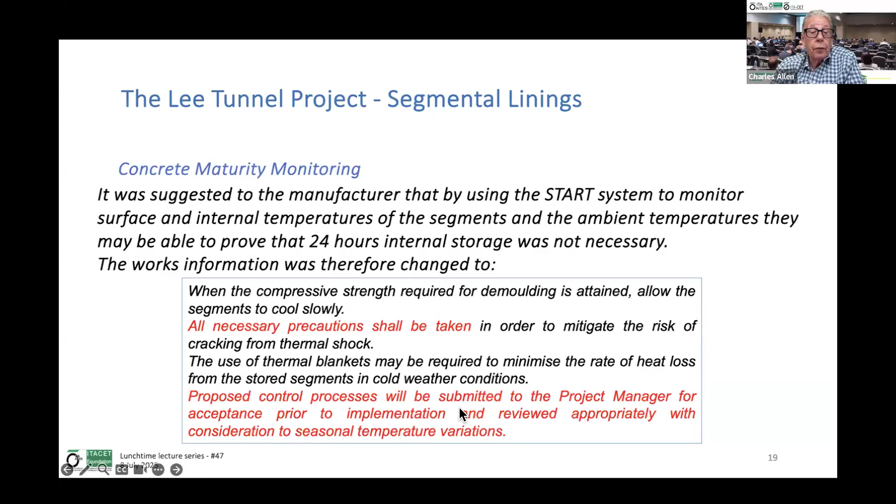So we changed the specification to allow proposed control processes that would be submitted to the project manager for acceptance prior to implementation, and reviewed appropriately with consideration to seasonal temperature variations.

The critical thing is this temperature differential between the segment center and the surface of the segment.

Now, traditional thinking is that you take the temperature at the center of the segment and compare it with ambient temperature. But because of the heat flux coming out of the segments, the actual surface of the segment never actually gets to ambient temperature for at least 24 to 36 hours after demolding.

So we proved that this temperature differential, which was only a maximum of about 15 degrees, was totally acceptable and within specification limits. And so we allowed the precaster to actually move the segments to outdoor storage, even in the winter.

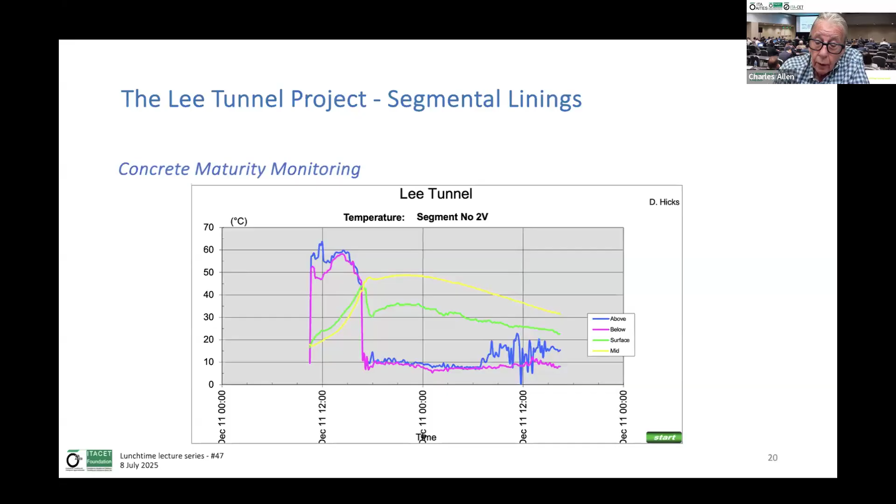Because we proved that there was no real threat of thermal shock in the segment, to summarize, the use of steel fibre reinforced concrete in the largest diameter tunnel that had ever been used in the UK. And remember, we currently have about 30 years experience of steel fibre reinforced segments in the UK.

The use of cast-in sealing gaskets, 3D laser checking and concrete maturity system enabled the segment manufacturer to improve productivity, reduce labour, reduce energy costs. He could lower the temperature in his carousel curing chamber.

It reduced segment defects. We had only less than 0.2% rejects after 13,000 castings, and it improved quality assurance, quality control procedures by not having to use cubes and getting them tested and then trying to compare them to the strength of the segment in the molds, because we knew what the actual segment strength was.

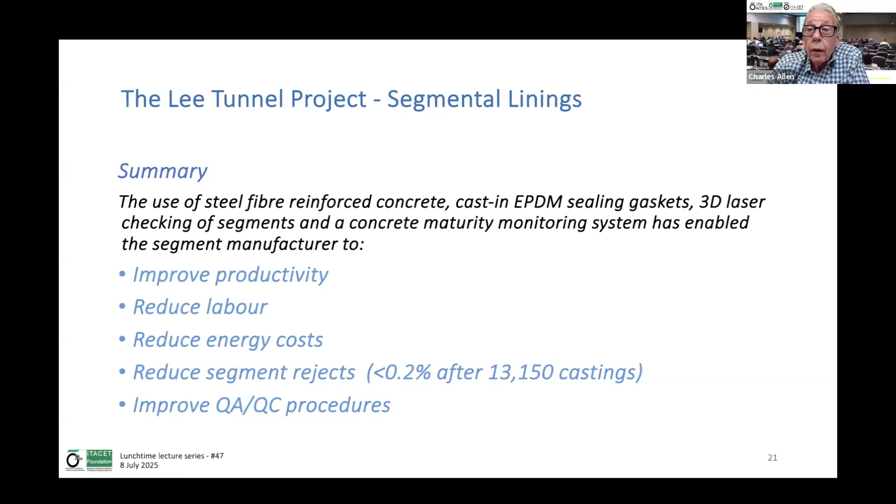So with that, I think I've finished, and I'll hand over to you, Kristen.